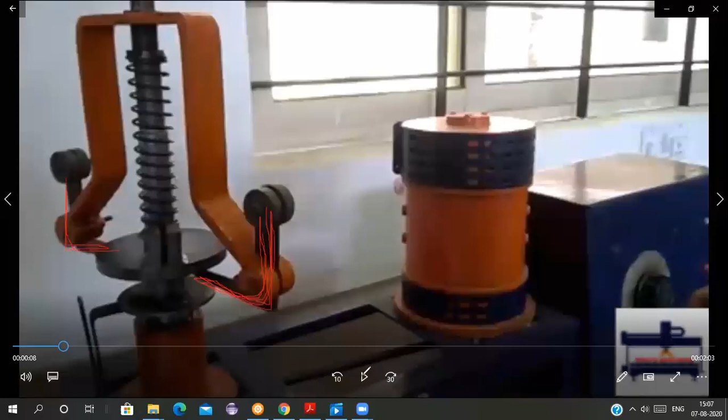I will explain the practical concept to you now. This is your one arm, and this is your second arm. It is a bent single arm, it is a bell crank lever here. Same way on this side, it is a single arm which is bent. So these are not two parts, it is a single part. All of you should know this - it is a single part.

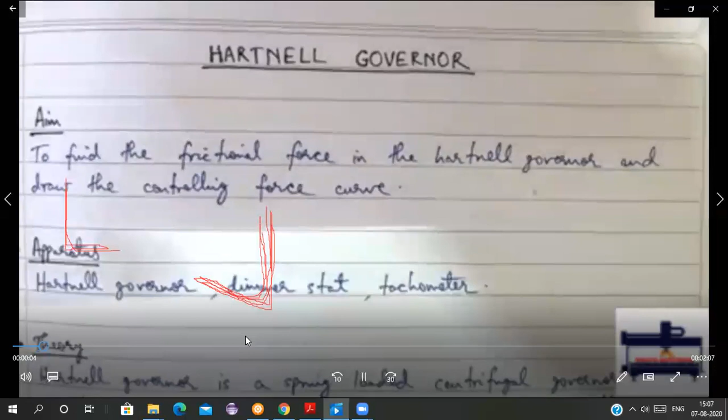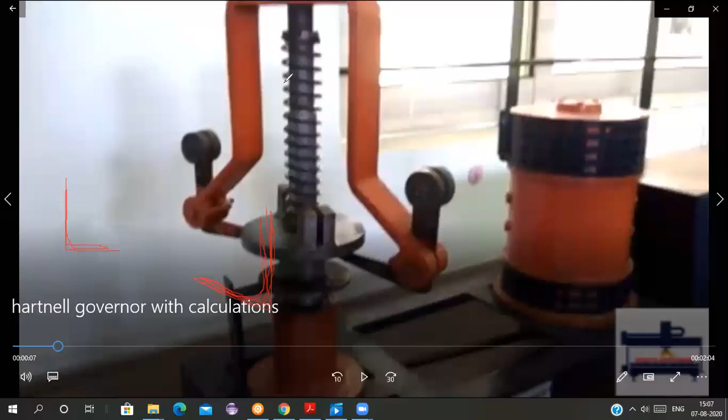So how is it working? See here now, as you all can see, it is having a difference compared to your Porter governor. In the Porter governor, different arms were used - the upper arm was different and the lower arm was different, just joined at some point like this.

Now what is happening here is this is a single bell crank lever. All of you know that a bell crank lever is a single arm, any steel rod which is bent. It is not different, it's just bent like this, so it is a single arm.

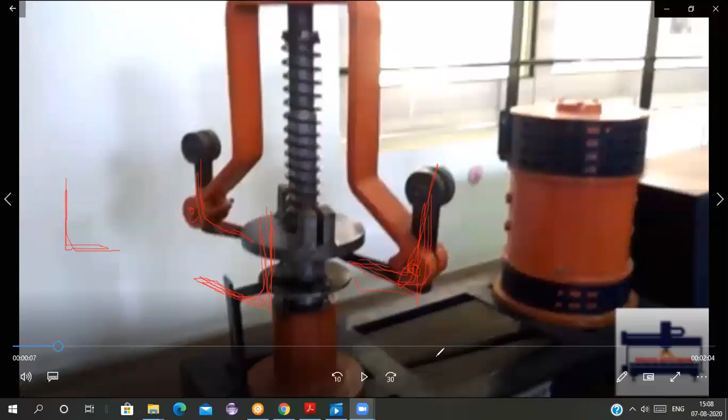Here also it is a single arm. So it is just bent and attached to this point. This point, on both sides, will not move - you can see this when I run it at the practicals. See, this is the frame.

And to this frame we have attached the bell crank lever here. So what is happening? This is the central sleeve, and to this central sleeve the spring is attached here.

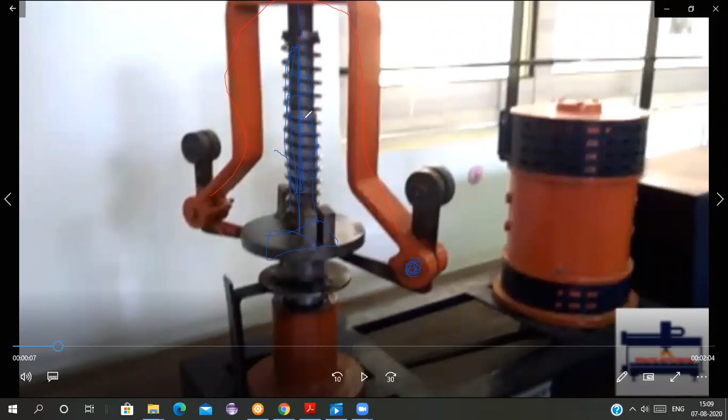On this sleeve, we are not putting load as in the case of a Porter governor - we are putting the spring. So this compressed spring gives the force to push it down. It is acting the force downward, in this direction here. Because of this spring force, the downward force is created, not because of the load.

In the Porter governor, on this sleeve we put load and try to create a downward force. But here, instead of load, we are using a spring. So it is a spring controlled governor, not a loaded type of governor - it comes under the classification of spring controlled governor.

So what will happen, Adnan? As this sleeve will lift, because of the increase in speed the whole system will rotate, and as the speed increases what will happen? All of you focus - you are not focusing on the lectures also taken by Zia Momin sir. Just see, this is connected with the help of this motor. We cannot take an engine here, this is a motor.

With the help of this motor, we are rotating the sleeve and controlling the speed of the governor. So see here now, what will happen - it will increase the motor speed, and because of the belt drive which is connected down here, it will rotate the governor.

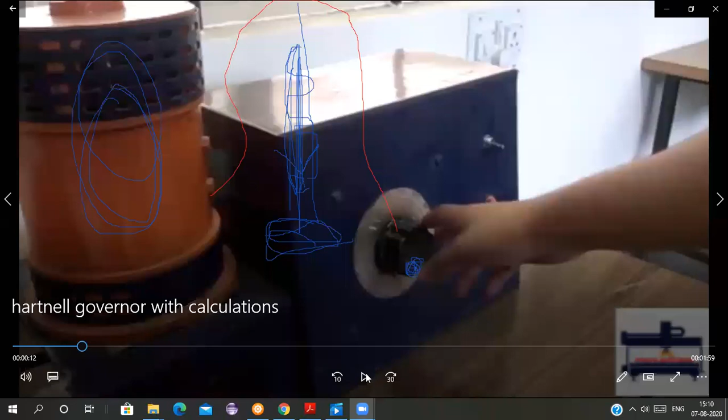But in actual practice, what is happening? Beneath this there is a belt drive, and the governor is directly connected to the motor. As the current to the motor is increased, the speed of the motor will increase and it will try to rotate the governor. But in actual practice, there is no motor - it is connected to an engine via gears. Hope you are getting all of this.

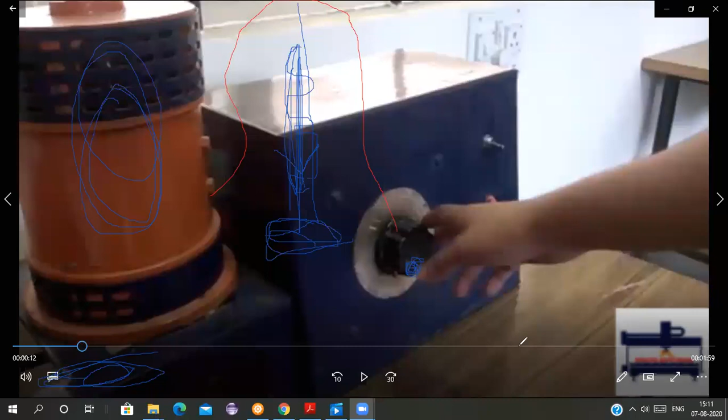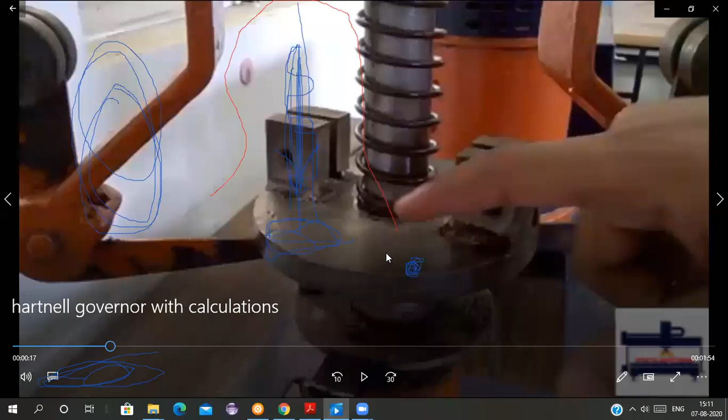So now what will happen? As he is increasing the speed, it will start rotating. The sleeve is in contact with the spring here, so it is continuously giving force downward, keeping it down. So you cannot easily lift it.

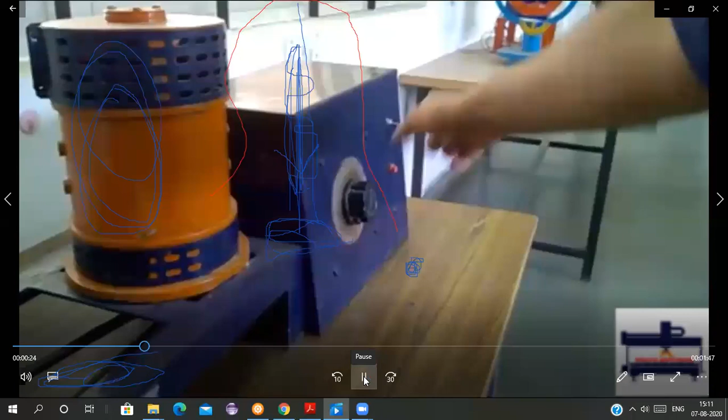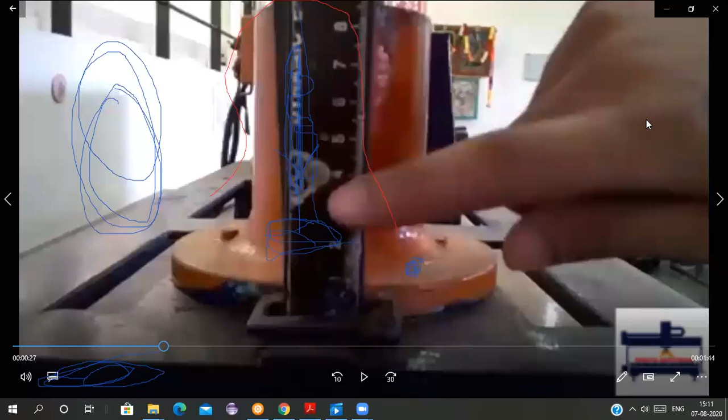We have to increase the speed so that - just a second, I will clear all the drawings. Yes, see, this is a scale which will measure the lift of the governor, how much it is going up - 1 centimeter, 2 centimeter, 3 centimeter. In the first case, he will take just 1 centimeter, then in the second reading he will take 2 centimeters. So as the speed is increasing, the radius will increase.

So now, see, scale is in centimeters. Okay, so see, it is not getting lifted so easily. Because of the arm which is attached here, just understand the working and the setup.

See, this is the arm, okay, of the bell crank lever which is attached. So because of this arm, what will happen? It will push it up, and the spring gets compressed, and the governor sleeve will lift up, and it will operate the fuel control valve, by an attachment.

All of you have learned that in theory, and what it will do, Adnan, is restrict the supply of fuel. It will not increase the supply of fuel. As the speed is increasing, we have to control it. Adnan, keep it in mind.

You are attending lectures, so you should know this: if the governor speed is increasing, the load has decreased. So as the governor sleeve is moving up, it is closing the fuel control valve, not opening it. Keep it in mind, and it is trying to reduce the speed to the desired value.

So all of you know it works on load. As the load increases or decreases, it operates. If the load has decreased, the engine doesn't have a load. So then what will happen? The fuel supply is there, and the engine speed will increase.

So the engine speed will increase to a maximum value. We have to keep it in a proper range. That is why we have made the arrangement that if the load has decreased on the engine, its speed will increase, of course, and therefore as the speed is increasing, we have to reduce it.

Okay, so see the video now.

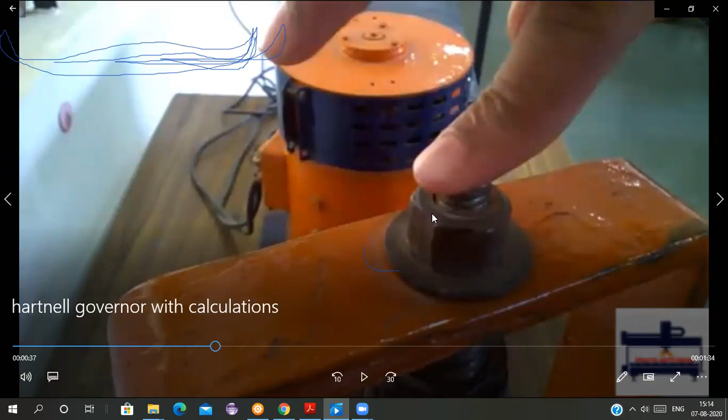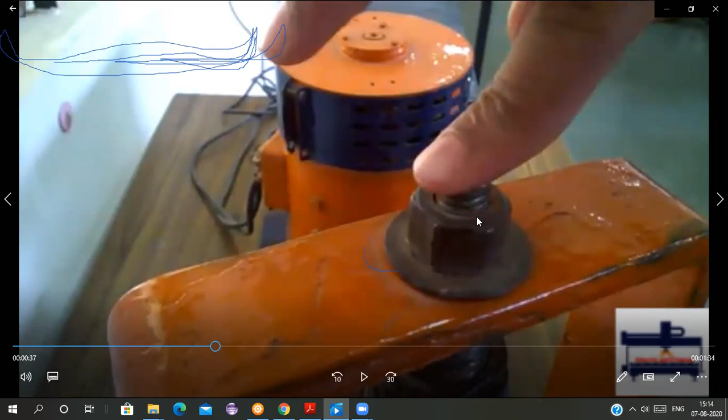See, we will keep a tachometer on this point, and we will note the speed of the governor or the speed of the spindle. We will get this with the help of a tachometer in our lab setup, and we will get to know about it in the practicals also. We will put a digital tachometer here, and a contact type tachometer we can put here too, and we will get to know the speed.

So now let us move ahead, just see the working now. We have to note the speed and the lift. Speed and lift, rest is all the calculation, and we will discuss it.

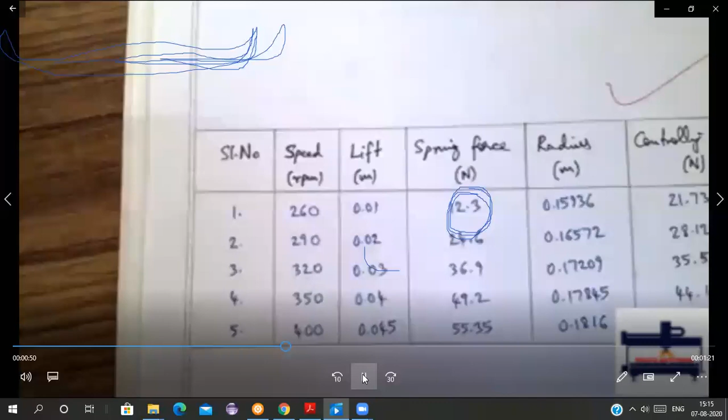We have to find out controlling force, radius, and all. This is just a diagram. See, all of you note it.

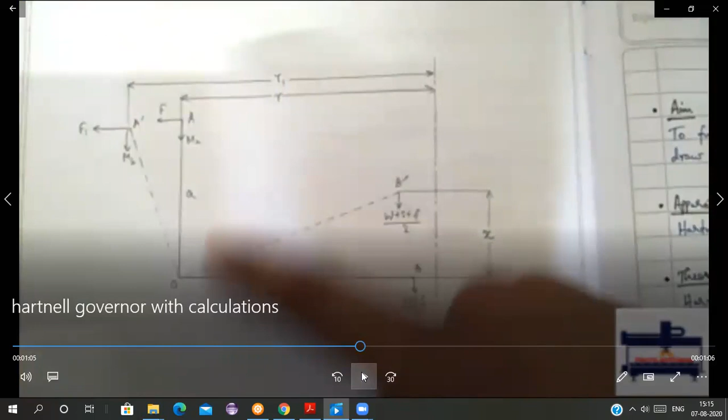See, all of you note this O point here, where the bell crank lever is attached to the frame. This is not moving from its point. As the frame is attached, it is fixed, so it will not move up or down. Only the bell crank lever moves.

See how it is moving as the centrifugal force is increasing, this is moving here. And what is happening, because this is moving here, the angle here is congruent. This is always congruent, this is always the same, it will not change. Here the 90 degrees will not change.

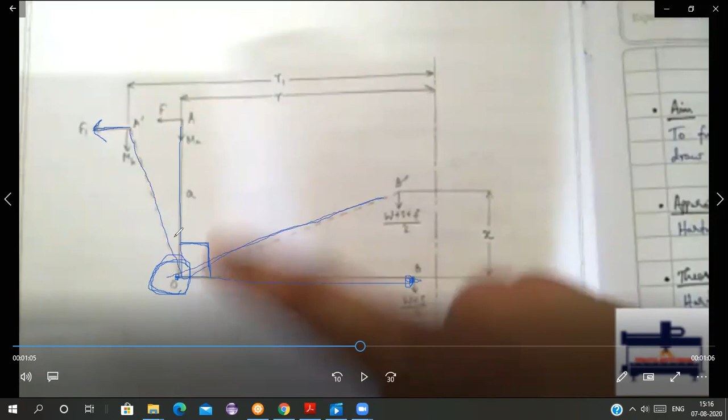So initially the position was like this, the bell crank lever was attached, and this point was below the sleeve. Now because of the speed increase, because of the centrifugal force, the next position will be this. The angle between the lower arm and upper arm will not change, it will always be 90 degrees, because it is just a single steel rod which is bent. So this angle will not change according to the conditions.

That is why only it is able to lift the sleeve. As this moves because of the centrifugal force, the upper arm will be moving like this, and the horizontal arm will be moving like this, and it will try to lift the sleeve which is located here at this point. Hope you all are getting this.

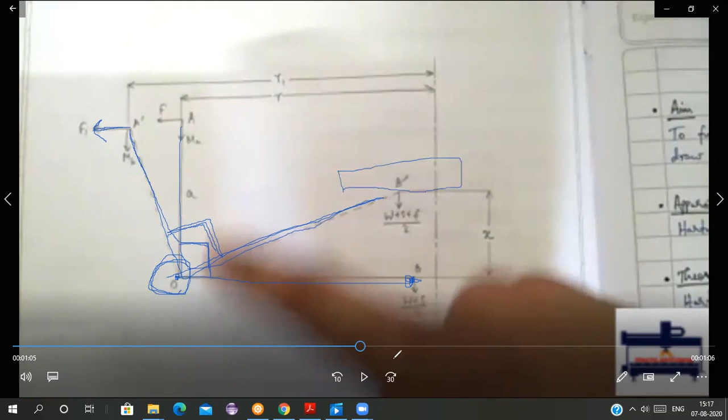So see here now, because with the help of the geometry, we are trying to find out the formulas. This is the horizontal, this is the vertical. We have to find out the length of the vertical arm and the length of the horizontal arm. We just have to measure it and find out. The length of the vertical arm, we used to do it in the practicals, that is from the center point here till this. This is the length of the vertical arm.

All of you know this, I think so, you have done it in theory. See in actual practice how it is going on. This is the length of the horizontal arm, and this is the vertical arm. So now see.

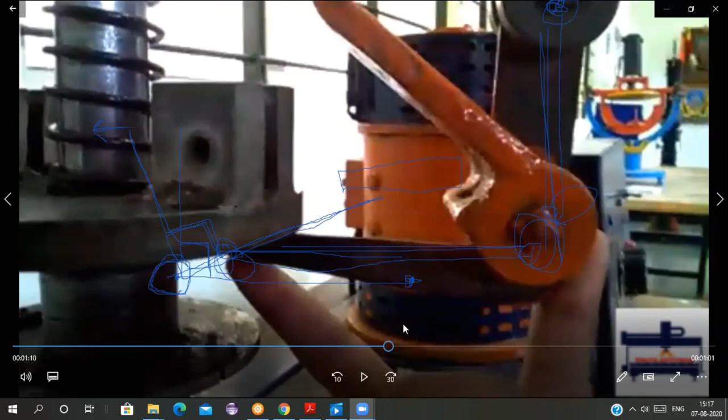The similar triangles which we are getting, by using that formula only we have derived the formula, all of you know. Next we will plot the graph.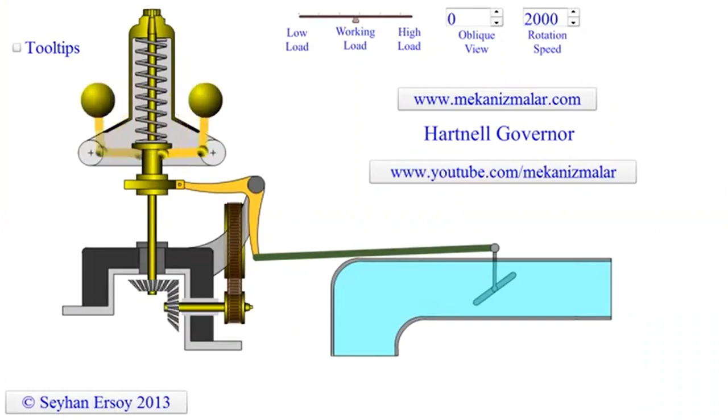See, this is the working. See, here is the governor. This is the arrangement. This is another arrangement done to control the fuel supply to the engine.

Here you can see with the help of the engine, and with the help of these gears only, we are getting the rotation to the central sleeve here. This is the central sleeve which is located here. So this whole setup will rotate, and what will happen, these balls will move outwards and it will lift the sleeve. Just observe it now.

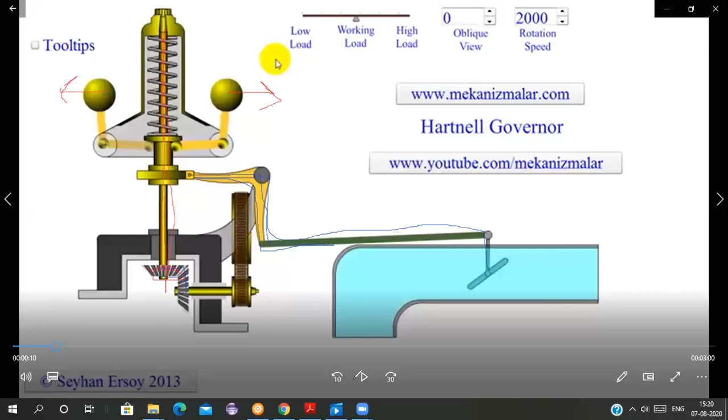See, this is the working load. See what is happening as I increase the load. As I am increasing the load, the load is increased means what? Let it be, some more passengers have sat on the vehicle. Because of some more passengers, there will be load on the engine, because now it has to do more work to carry that many passengers. Another thing is that it is going up the hill, up the mountain. Then also there is a high load on the engine, and therefore you require more power. So what you have to do is increase the supply, give more fuel to the engine. So see here, now the load is increasing.

When the load is increasing, this is the high load. So what will happen at high load, this fuel supply here is allowing to give more fuel supply, here.

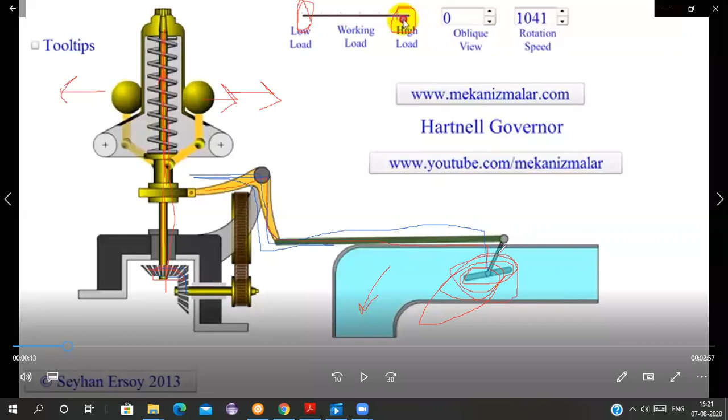And when the load is decreasing, it will move here. So what will happen when the load is decreasing, automatically the engine speed will increase, this sleeve will move up, and the radius of rotation will increase, and therefore this will move up. As it is moving up, with the help of this lever, it will try to close the fuel supply. The whole fuel supply will not be closed, so there will be some amount of fuel supply to control it. So now see.

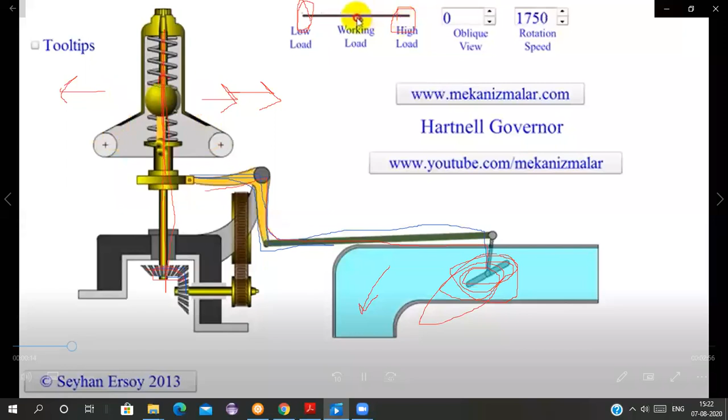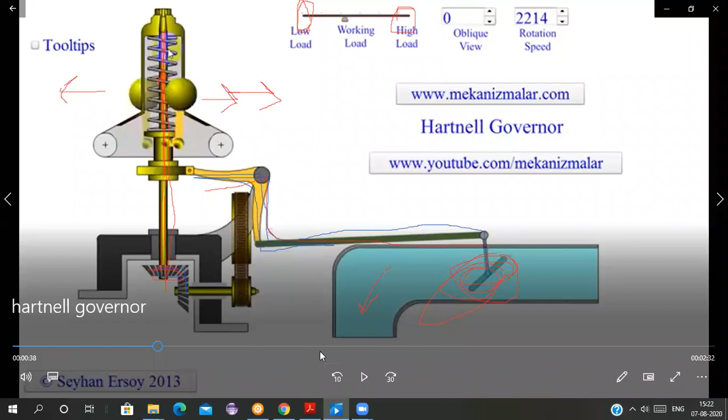One thing is very important: this frame is not rotating here in this animation, but that is done purposely. Just note it down, the frame is not rotating here in the video, but in actual practice the whole frame, the whole setup is rotating, you might have seen that. This is just to show you that this point is not moving from its position, it will not move outwards, upwards, downwards, or anywhere else. So this point will not move. Hope you all are getting this. I will show you the actual setup also.

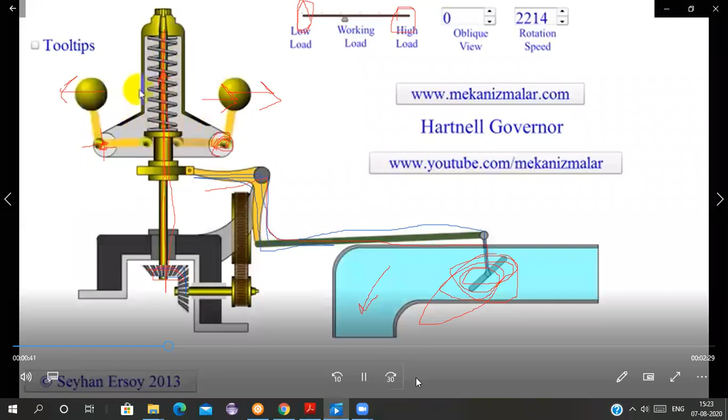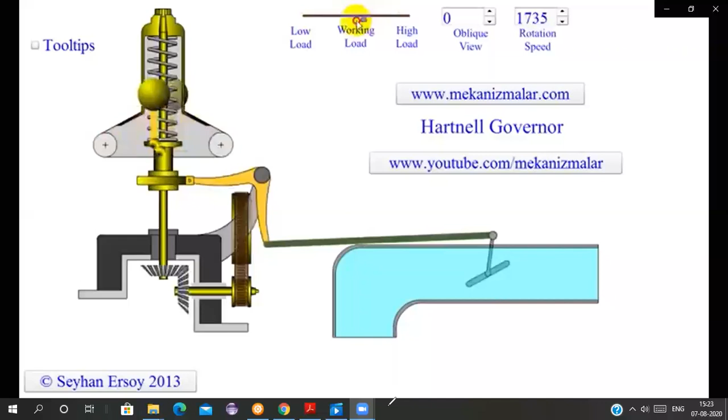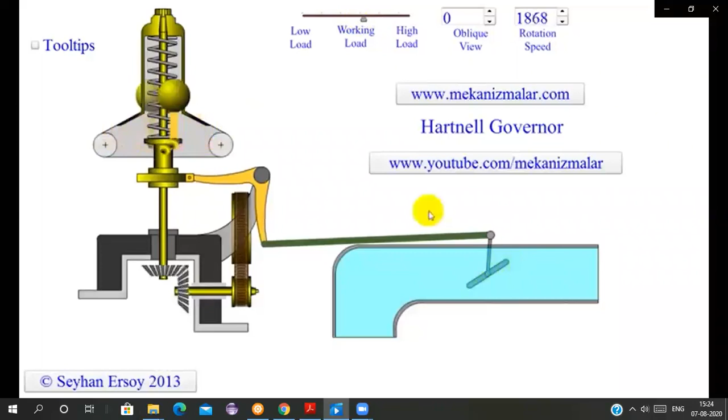See what is happening now, the speed. All of you observe this. I hope you all have seen this. Zia sir might have taught you with the help of some videos also.

See what is happening at low load. There is low load now, the load has decreased, meaning there are few people in the vehicle, and you can say the vehicle is moving downwards. So there is no load, so when the load has decreased, what has happened is the speed of the engine has increased because there is no load. It doesn't have to do much work, there is no load on the engine, it is free, so it is increasing.

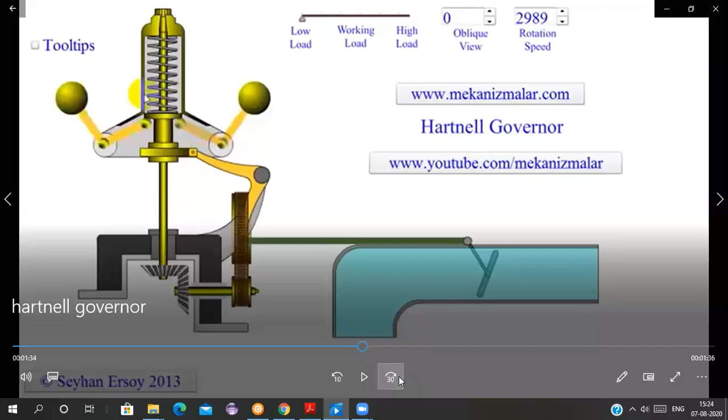Because of less load, the speed has increased. As the speed increases, this sleeve is moving upwards, and as it moves upward, this horizontal arm changes its position like this. It is able to change position because this vertical arm has changed position, and there is a centrifugal force acting on the ball here, in the outward direction.

As you can see, as it has moved up to this position, the fuel supply is decreased and closed here. Observe that the radius of rotation has increased. The height of this governor has decreased, okay, same as your Porter governor, this is the height of the governor. This is not required in the calculations, I am just showing you. So what is happening? The fuel supply is cut off.

Why are they cutting off the fuel supply? Because there is no load on the engine, there is very less load. Because of that, the engine speed has increased. See here, the rotation speed has increased, and because of that there is more speed than we require. It should not go above the range. So therefore, it has cut off now.

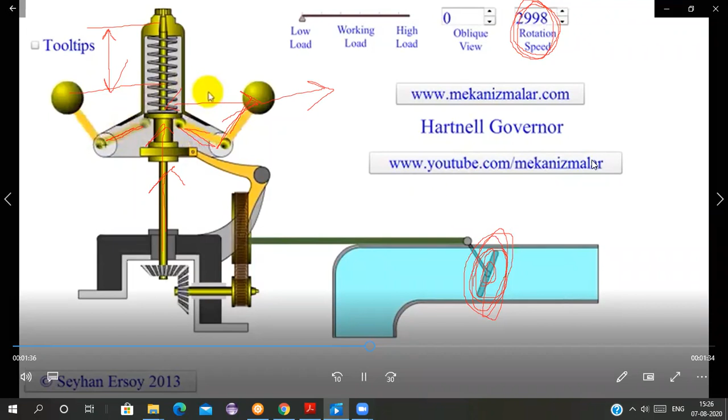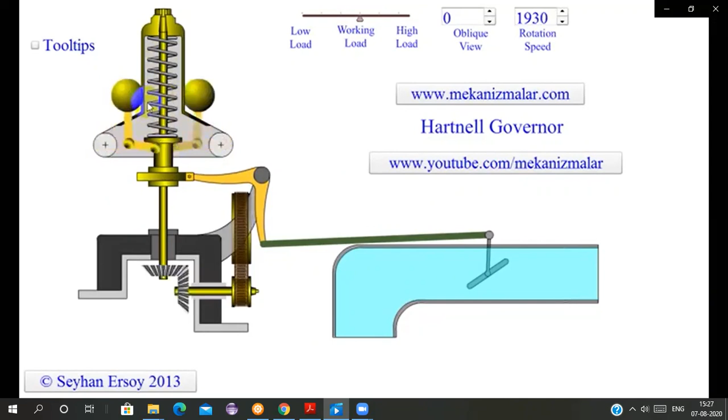See, the spring force has increased as the central sleeve has been forced upward. The fuel supply is cut off. Now, as it is going to working load, the rotation speed has decreased. It is sensitive to the speed change of the engine.

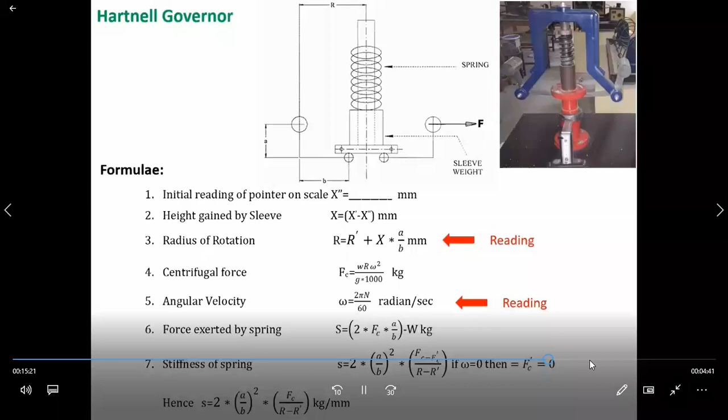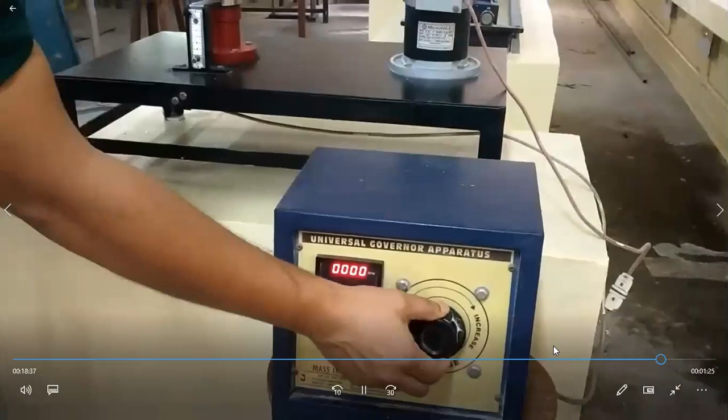See, this is our Hartnell governor, and here he is increasing the speed with the help of a controller. See, at some speed it is not moving up, the sleeve is not moving up.

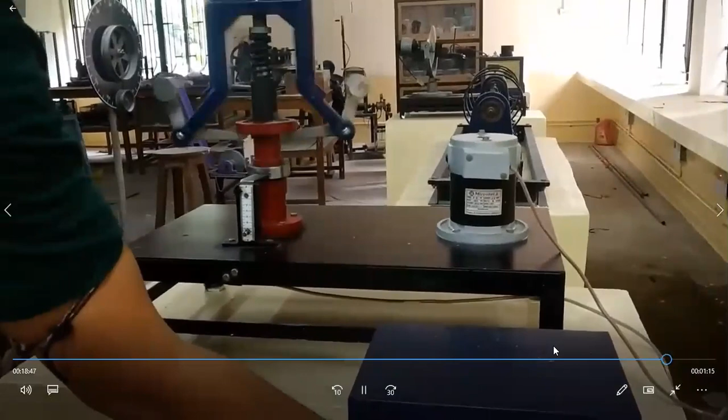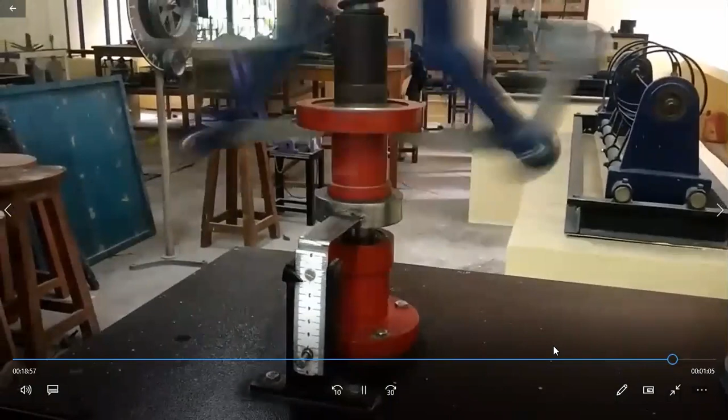Now the sleeve displacement is there. The sleeve has lifted up, and the radius of rotation is increasing. See, the frame is also rotating. So sleeve lift and the radius, these are the two input parameters.

With the help of these input parameters, we have to calculate the values. The frame is also rotating, and the point at which the bell crank lever is attached to the frame stays at the same place, it is not moving.

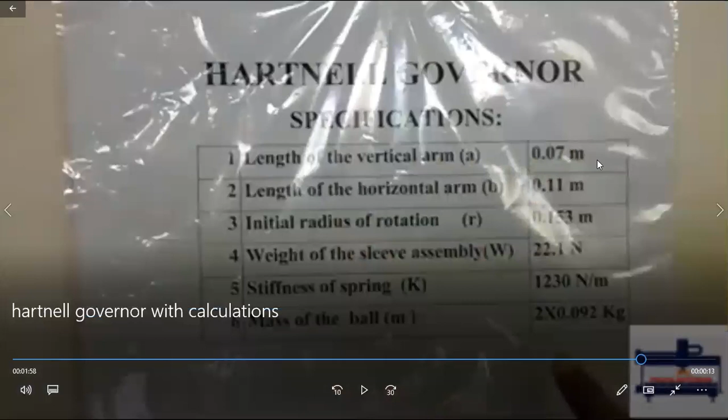So let us move to the calculations now, it's very simple. We have to take these values. Length of the vertical arm is 0.07 meters, length of the horizontal arm, taken as B, is 0.11 meters. So the length of the vertical arm is less, and the length of the horizontal arm is more.

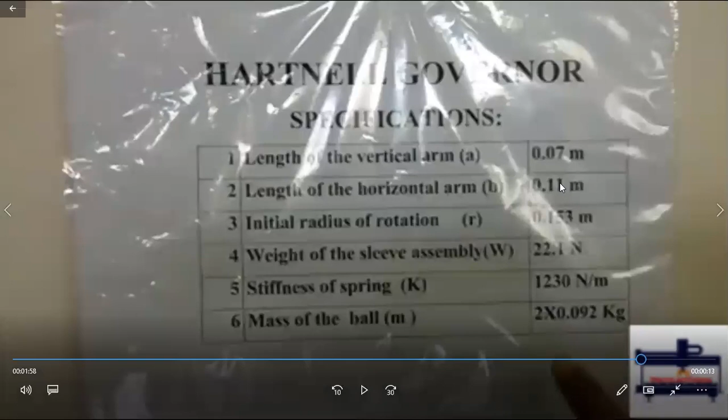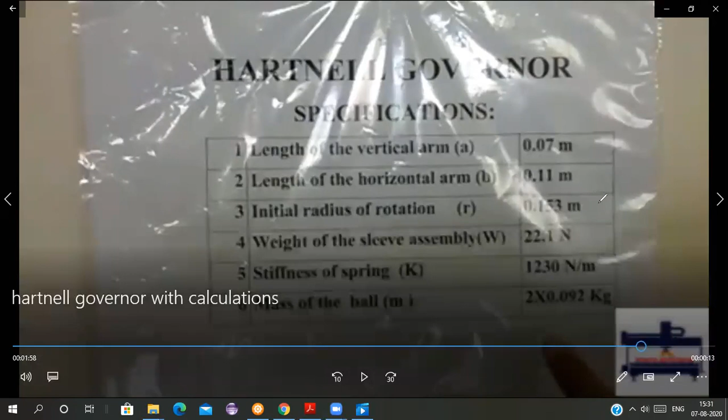Because the length of the horizontal arm is more, there is a distance between the central spindle and the frame. Another thing is the initial radius of rotation when the governor is not rotating, that is 0.153 meters. This is the initial radius of rotation.

Weight of the sleeve assembly is 22.1 Newton, that is approximately 2.2 kg weight of the sleeve, so it is quite heavy. This weight acts downward and the spring force also acts downward. This is the stiffness of the spring which we have taken. These are all the specifications given by the manufacturer.

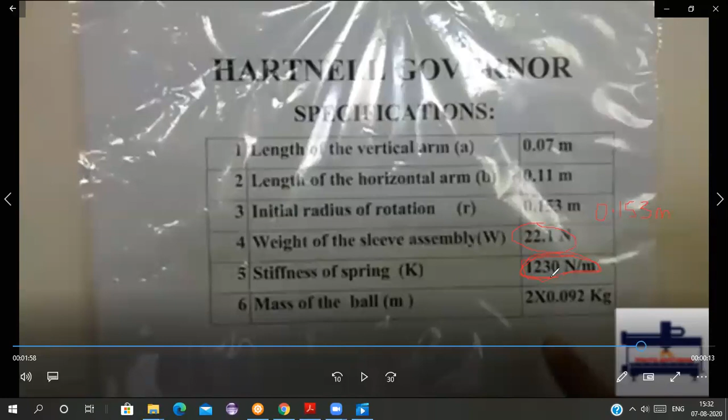Stiffness we are using is 1230 Newton per meter. Mass of the ball is 0.092 kg, and since there are two balls, they are multiplying it by 2. Hope you all are getting this. Now we will move ahead.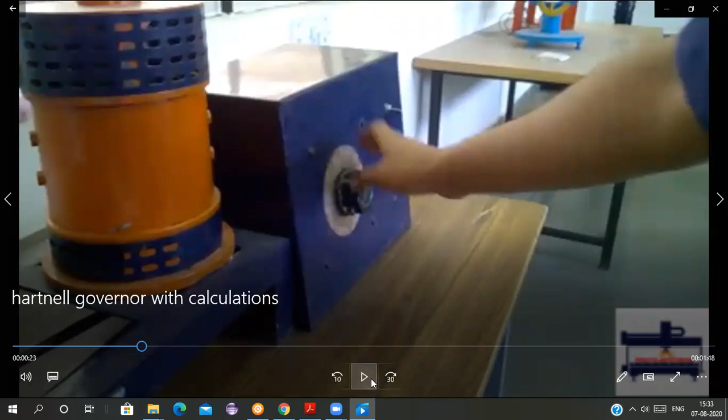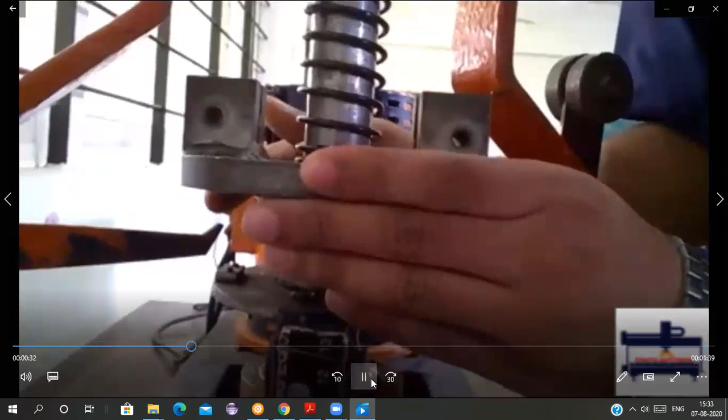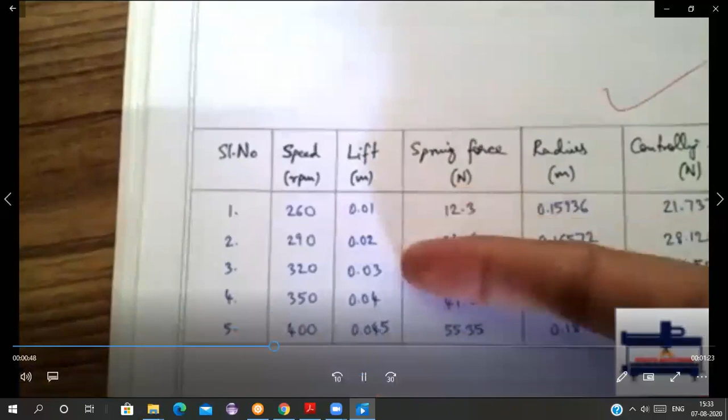Okay, don't get confused. Now you have to calculate the values, all of you. Just note down the observation table, note down the specifications. You just have to find out the values. Make this observation table, all of you, and try to find out the values.

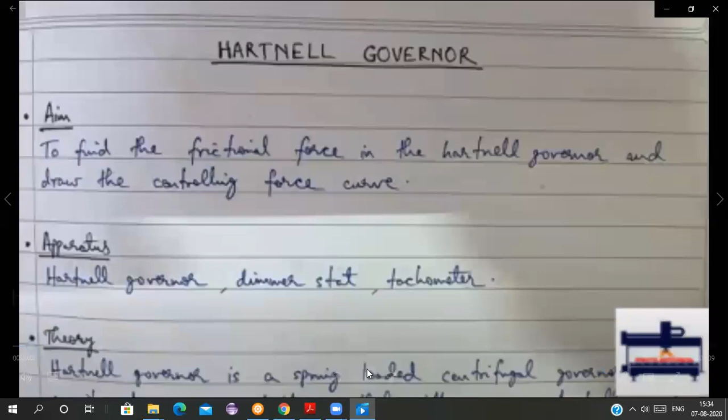Yes, see serial number 1, it is 260 rpm. At 260 rpm what he found is that the lift is 0.01 meter, that is 1 centimeter. Before that it did not move up. And spring force in Newton is 12.3. So this he has calculated, and radius also he has calculated, and controlling force also he has calculated. The only thing we are getting is these two things - speed and lift - that is the observation we are getting. Rest all the things we have to calculate.

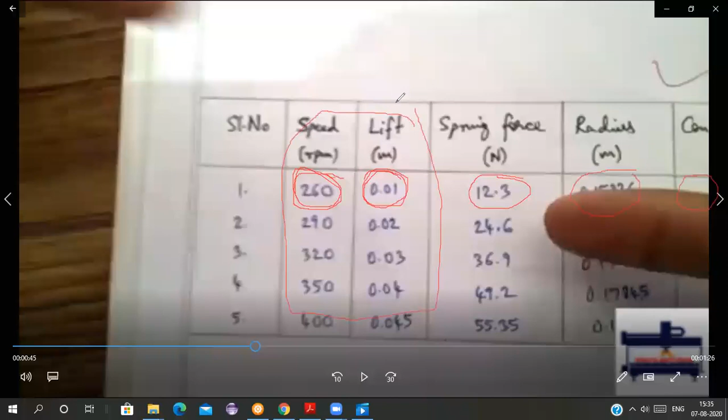So you just find out one value. With the help of these values you can use the calculation. All of you know this formula if you have done the theory. So radius of rotation is calculated by this formula: r1 is equal to a by b into x plus r.

This a is the length of the vertical arm, b is the length of the horizontal arm, a by b into x - x is the sleeve displacement, that is 0.01. And r is the initial radius of rotation, meaning the point when we have not started. We can easily measure it with the help of a scale, which we used to do in our lab practicals - we just took a scale and measured the initial radius of rotation, that is the distance from the central axis to the ball.

So that is 0.153 meters, approximately 15 centimeters. All the things are in meters. Hope you are getting this. So I am getting the radius of rotation at 260 rpm as 0.159. The spring force is given by K into X, where K is the stiffness - stiffness we know is 1230, into 0.01, you will get 12.3 Newton.

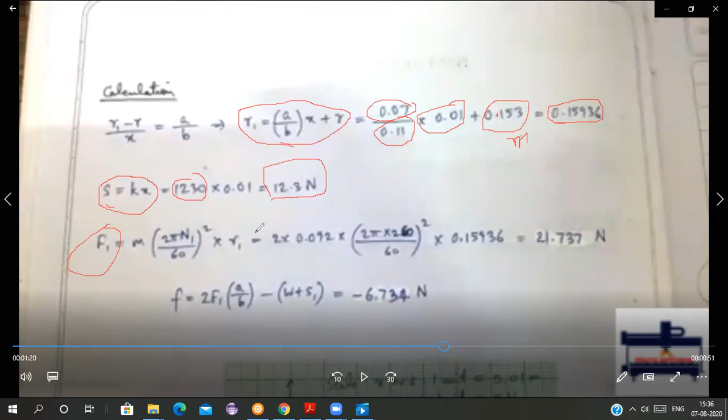This is the centrifugal force F1, given by m r omega square. So we have calculated the radius of rotation at 260 rpm, we have to substitute it here. This is my 2 pi n, that is 260 rpm. And if I multiply it by 0.15396, or 0.15936, we'll get 21.737 Newton. So this is my centrifugal force which is acting at the ball.

Centrifugal force acting at the ball - so I will get the centrifugal force. I have to plot the graph of centrifugal force versus the radius, and I have to know the values. So can you all calculate for the next thing and tell me? Now he has increased the speed, so just calculate and try it.

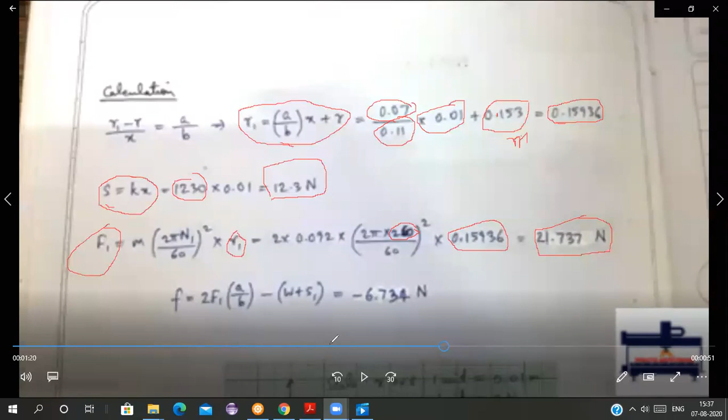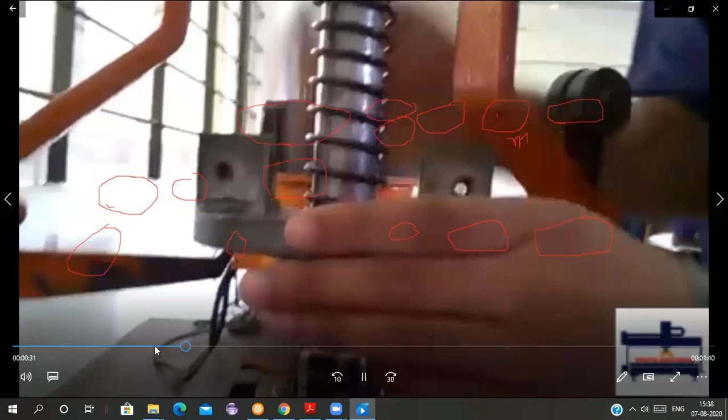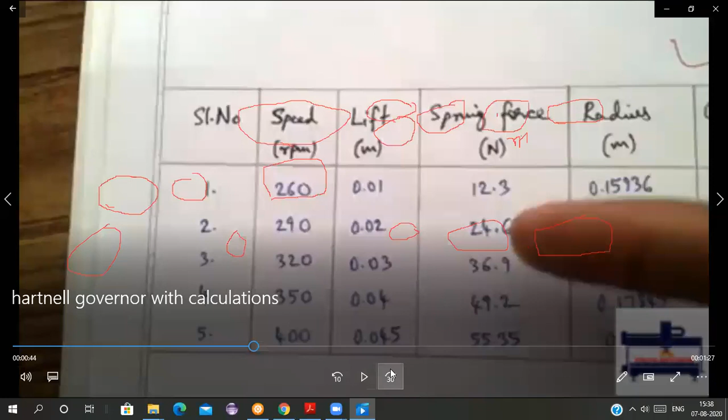Now he has increased the speed and he is getting the sleeve lift as 0.02. See here, he is getting the speed as 290. At speed 290 he is getting 0.02 as the sleeve lift. See, we are at the second one now. So can you all tell me the values? See, spring force is coming out as 24.6. Can you all calculate and verify it?

What is the spring force? What is the centrifugal force? What is the radius? Can you all calculate it, students? Yes, please reply, will you? Are you all interested? See, only 1 minute is remaining for our practical. You have to rejoin, okay. So hope you are getting this.

We have to verify it, and we have to plot a graph of centrifugal force versus the radius. So we can easily analyze which type, how the governor is working. So all of you should just start and tell me the values. Hope you have taken a book.